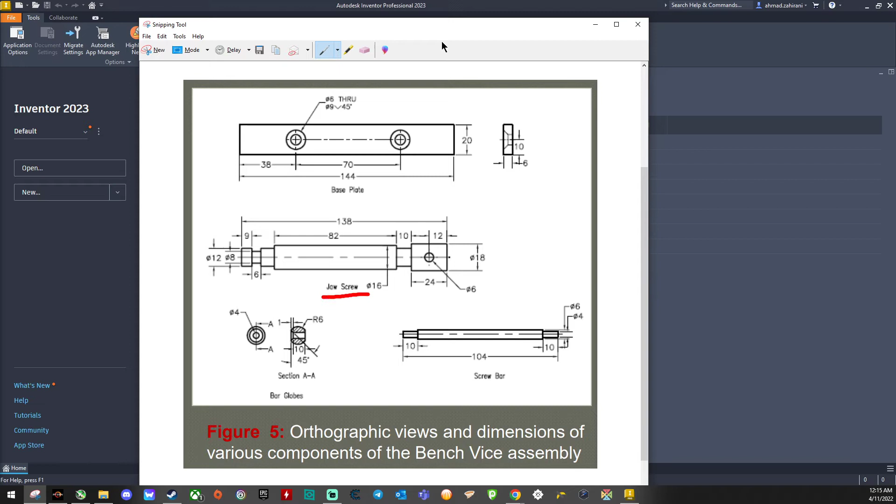In this video tutorial, I will show you how to draw the jaw screw. So let's get started. As usual, select create, select new, and select the axis that you want to start to draw. In this example, I propose starting with the Y and Z plane.

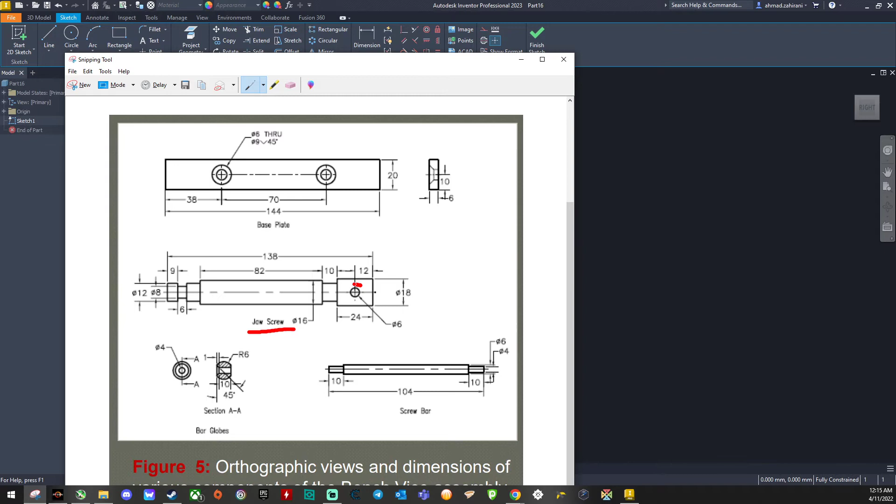We start with the rectangle. All the components we want to draw are actually in the shape of circle or cylinder, but in order to create this circle, it's best if we can create our drawing initially using a rectangle. The size is 18 by 18. Press enter, make it center.

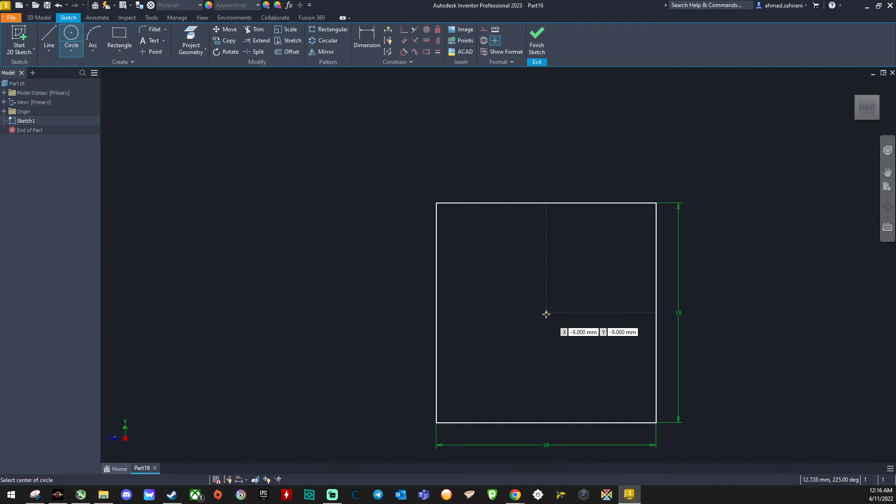Select circle, and using your cursor, move to the center, the midpoint of this line, and slowly move the cursor downward. You can see a dotted line. Just when you're about to reach the center, another dotted line appears on the right - this is the center of this rectangle. Select this point. The diameter is 6. Press enter.

Select 3D model, extrude, and select the value of the distance as 18, then press enter.

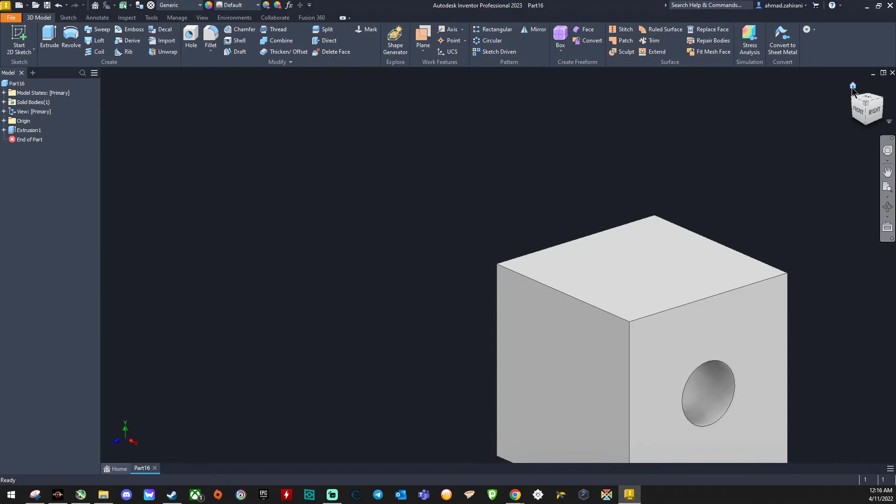Go back to the home view, and from this part right click and select new sketch. As usual, start with a center line somewhere here. Right click, select OK, and categorize this one as construction.

Select circle and find the midpoint of the line, going down until you reach the intersection. No need to click - only when you reach this point do you click, then make a circle with 18 millimeter diameter and click the mouse.

Using the line function, create a line on the perimeter of the rectangle, to all 4 corners of the rectangle, going back to the starting place.

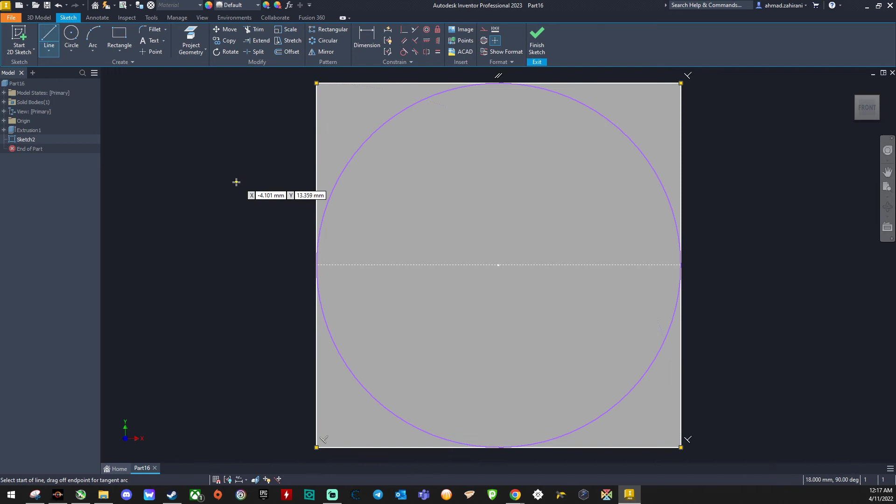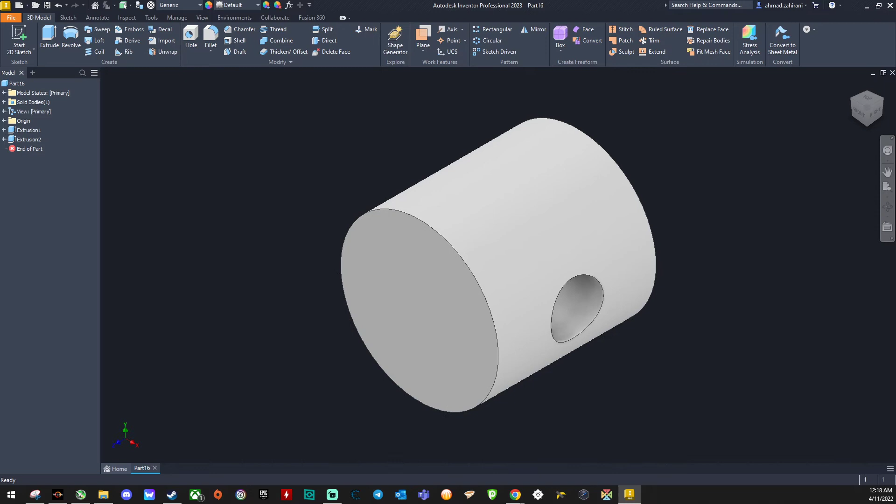Go back to the isometric view and select 3D model, extrude. Select first the direction, flip it, then select the profile that you want to remove, and press OK.

Now we have created the first section of the component together with the circle at the center. The rest is just straightforward to sketch and extrude, and so on.

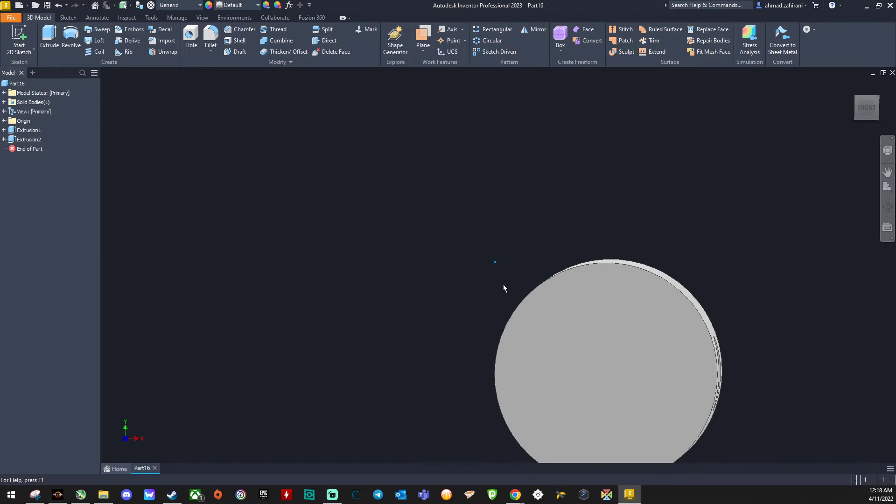So let's get started. New sketch, circle, find the center dot, and the diameter over here should be 12. Press enter. 3D model, extrude. The distance should be 10.

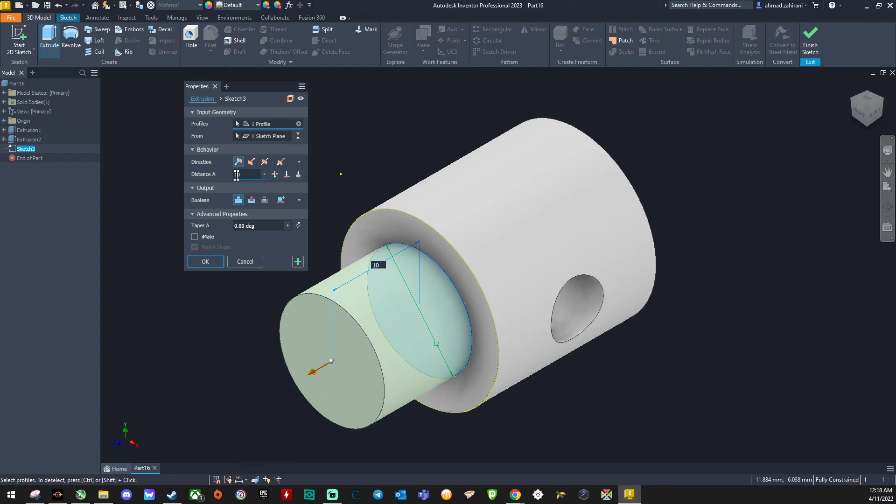Then right click over here, new sketch, click center, circle, move your circle to the perimeter, and you can see this dotted origin. Again the diameter is 16. Go back to the isometric view, 3D model, extrude, select the profile.

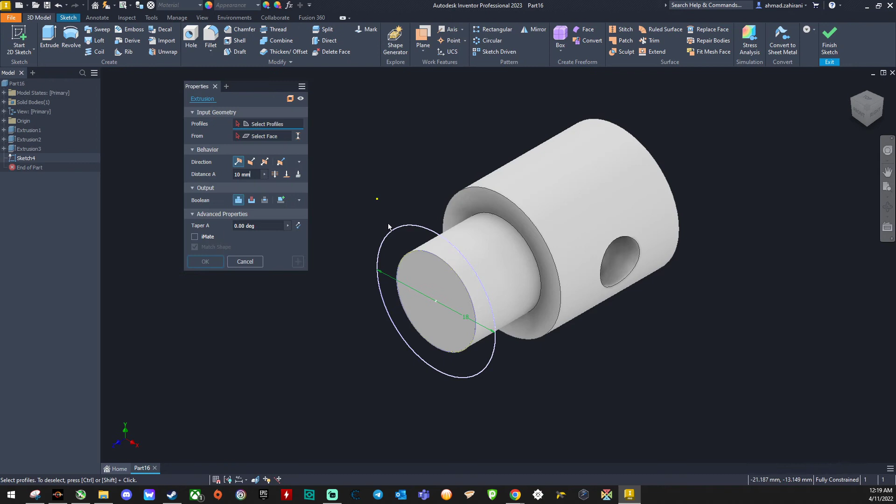Make sure you also select the area inside of it so that the extrusion becomes full, not hollow. The length is 82, press enter.

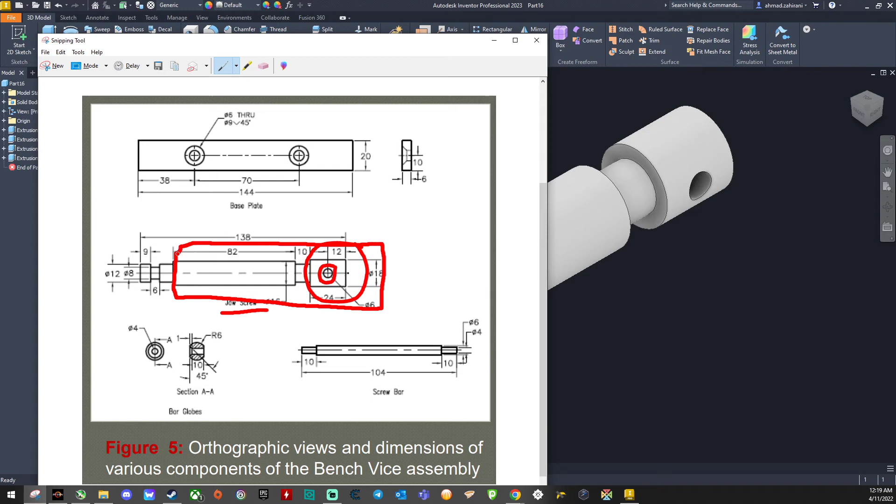Okay, now we have completed up to this point, and the rest is only 3 more cylinders to draw.

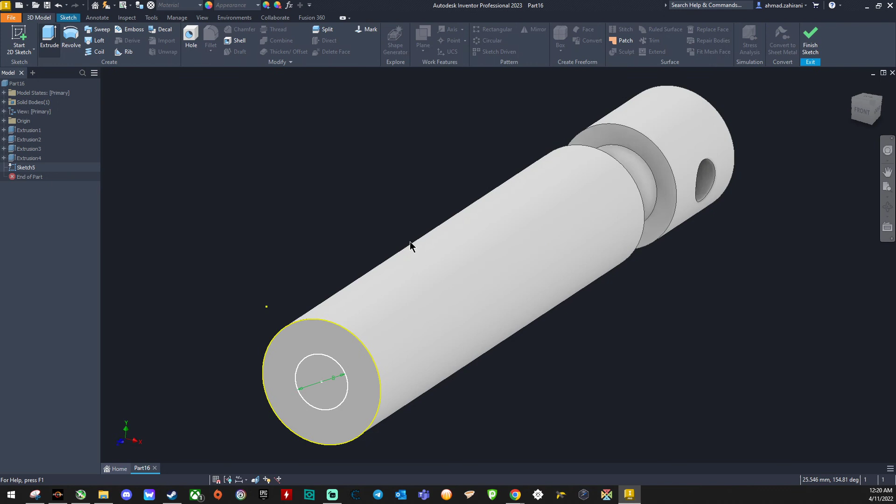Repeat the process. New sketch, click circle, find the origin. The size over here is 8, then select 3D model, extrude. The distance is 6. Press enter.

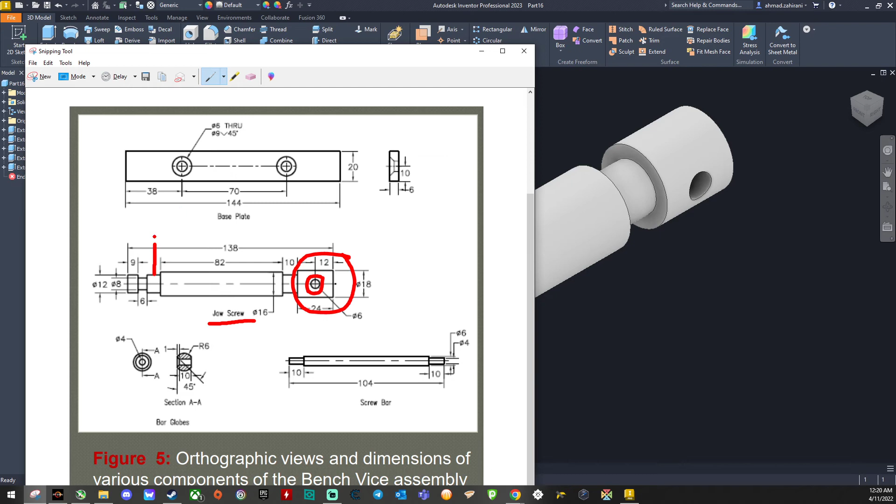I think there's a mistake - I drew the 6 over here first. It should be the third one from the left: 1, 2, 3. I should be drawing this one first. So I have to move back, go to extrusion 5, right click and delete. Okay, we start again - right click and select new sketch.

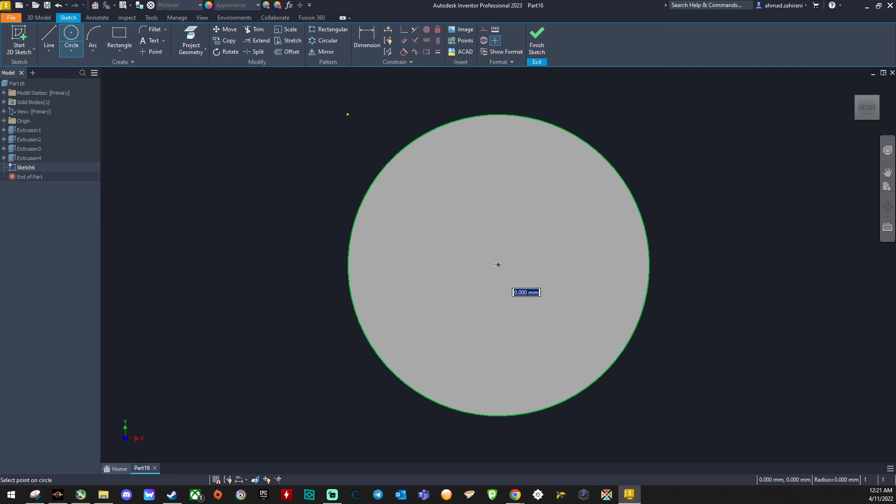Circle, find the center, and the diameter is 12. The extrusion is 10.

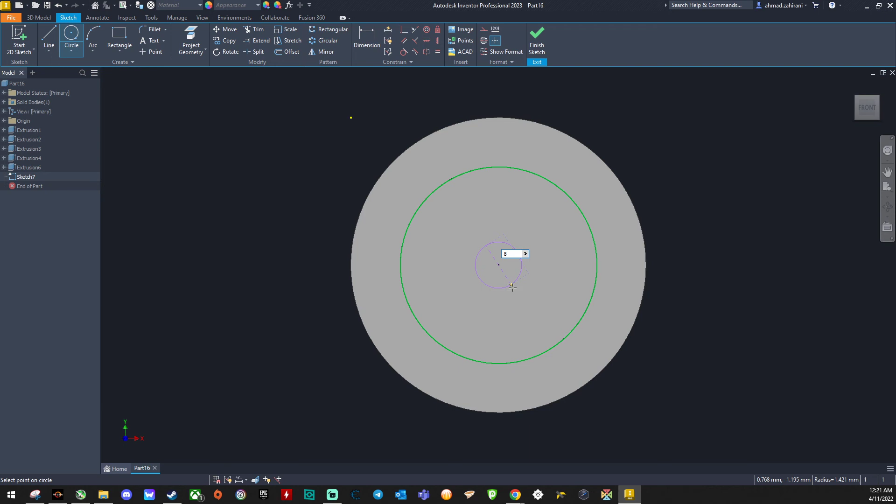Continue - new sketch, zoom in, circle, find the origin. This one supposed to be 8, the one I drew originally - 8. Then extrude, the length is 6. Press enter.

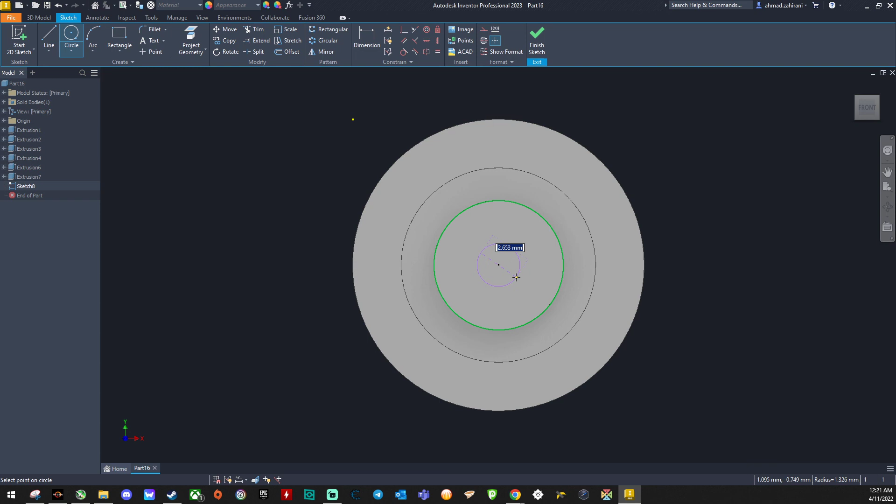And the last component: new sketch, zoom in, circle, find the origin, and the diameter should be 12. Press enter, turn to isometric view.

3D model, extrude. Select the profile inside the smaller one and also outside the bigger one, then the length should be 9, press enter.

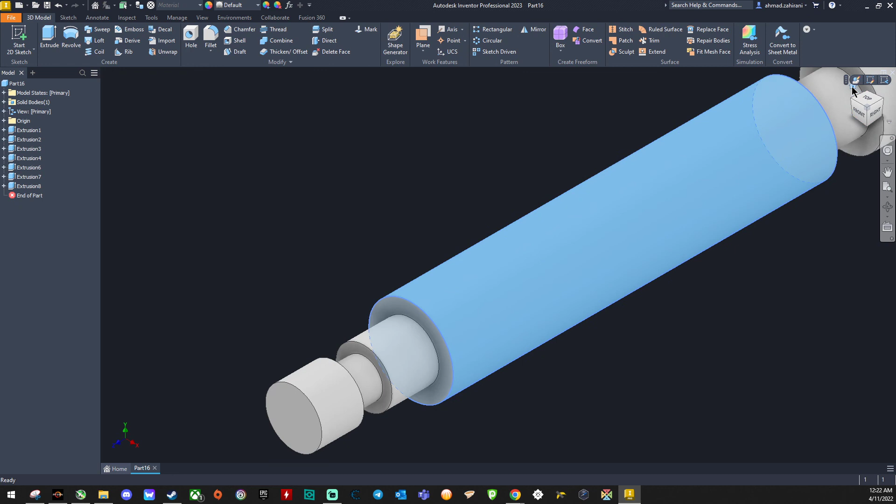So I think we have completed the drawing of the component. I believe this is quite straightforward - it's just that I made a mistake over here.